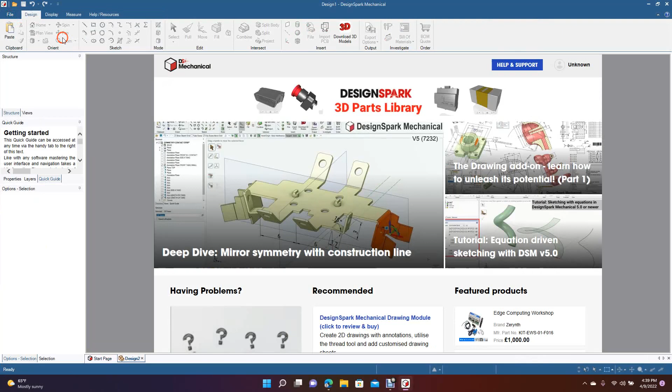Okay, we're going to go ahead and go to File, create a new design. We'll go ahead and change this to Plan View. Then we're going to come over here to File, go to DesignSpark Options, and make sure that this is in units, is in inches. So we'll go ahead and change that to imperial. Go ahead and click OK.

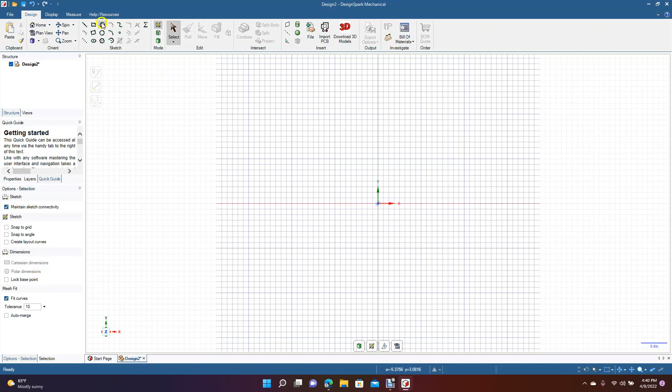Alright, so the first thing we're going to do is I got a picture of this graphic. We want it to be, looks like 1.125 in diameter. So we're going to go ahead and get our circle tool, and then we'll go from the center there and we'll type out 1.125, and then we'll do Control plus to zoom in.

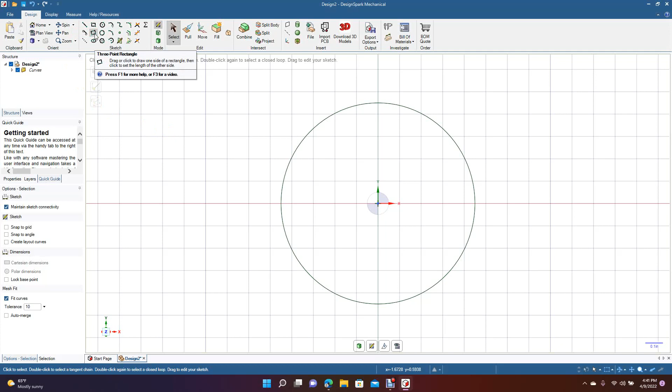Okay, this is going to be a 4-prong. So what we need to do is get a rectangle tool. So we'll go ahead and get this 3-point rectangle, and we'll define from center.

Then we're going to go ahead and drag that up, and we want to make it like... point one's not wide enough.

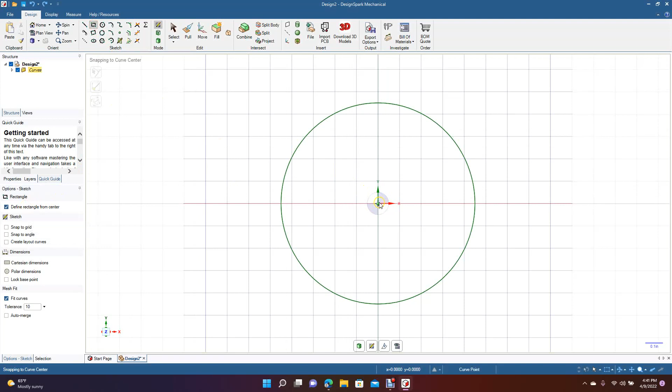Let's go to the regular rectangle, define from center. We'll click and we'll drag out. Let's make that about... let's go 0.3, so there'll be some room for you to grab the knob there.

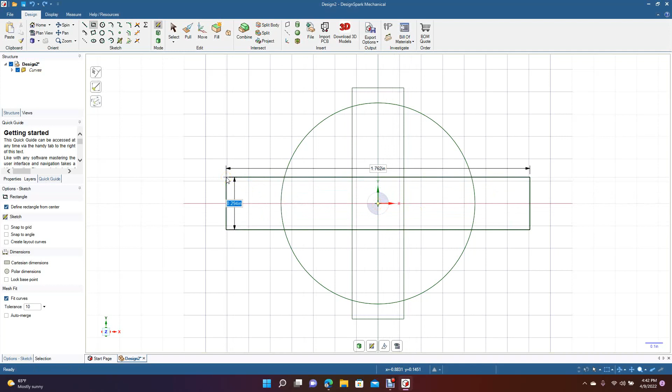Okay, now we're going to grab another one, so we'll go rectangle, define from center, and then we'll do one out here. We're going to type in 0.3 so it matches the other one. Oops, something happened there. Let's undo that. Let's go tab 0.3. Okay.

Now we have our little knobs in there.

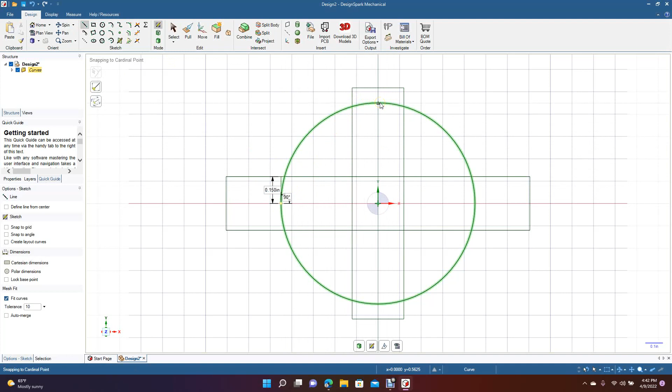Okay, so what we want to do is let's go ahead and get our line tool. We're going to put a line there, and then we're going to go ahead and put a line over here. Okay, so we have an actual point.

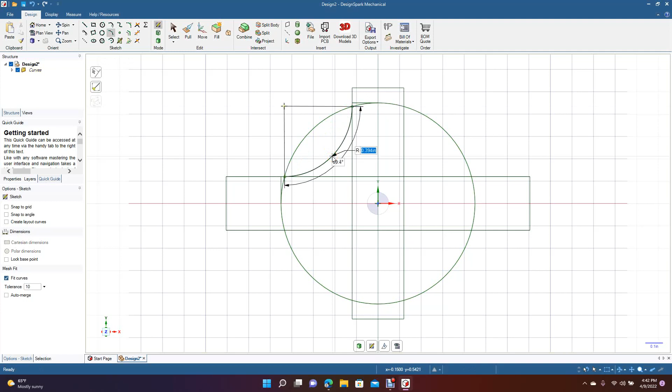Now we're going to go ahead and get our 3-point arc, and we'll click. Let's go from that corner there up to here. Didn't really need those lines after all, and then we'll go ahead and just end it there.

Alright, now we'll go ahead and get our trim away tool. Let's get rid of these. Let's get rid of all those.

Okay, we really only need this piece right here to rotate around.

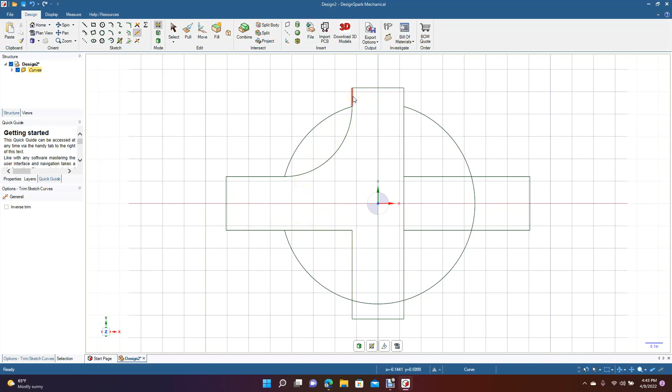So what we're going to do is go ahead and get our select tool, hold down Control key. We're going to get those there. We're going to go to move, then we're going to create pattern. We're going to drag this to the center, and then we're going to spin this around and then let go. So we have 4.

Okay, now we'll go ahead and get this trim away. Let's go ahead and get rid of those.

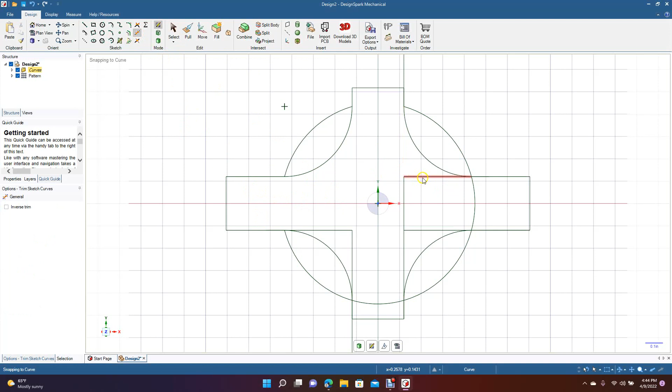Okay, this looks pretty good. This is going to be our knob right here.

The only other thing we need to do is cut these down shorter. So what we'll do is go ahead and put a line in here from the center. This is going to be 0.647. So we'll go ahead and get another line, and we'll go 0.647, enter. Okay.

Now we're going to go ahead and we can actually move this over. So let's go ahead and move. We'll select that line, and then we'll actually undo. We're going to go select this up to, and we're going to go up to that point there.

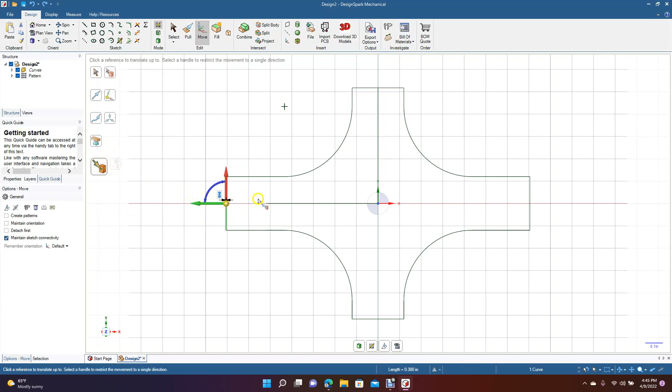All right. Now we're going to do the same thing there. We're going to click on that line, hit move, and then we're going to move. Let's change the anchor point. So we're going to go right here, anchor here, and then we're going to select this up to, and we're going to go up to here. Actually, that didn't move it.

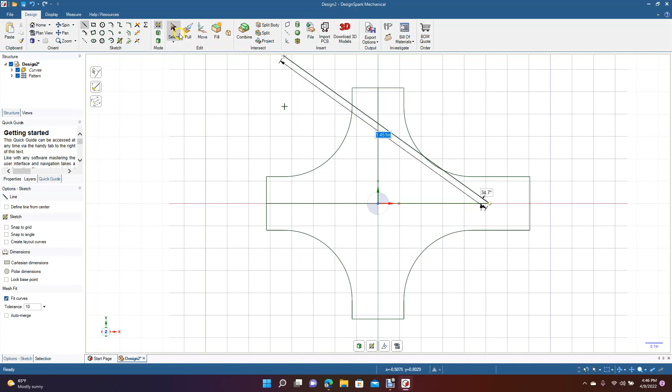Oh, 0.647. Let's put another line in there, going from here. Type in 0.647, enter, and then we'll select. We're going to click on move, move that line, and go up to this point here. Okay, now we have the knob that we need.

We'll go ahead and get the trim away tool, get rid of these. Alright, that's going to be our base knob.

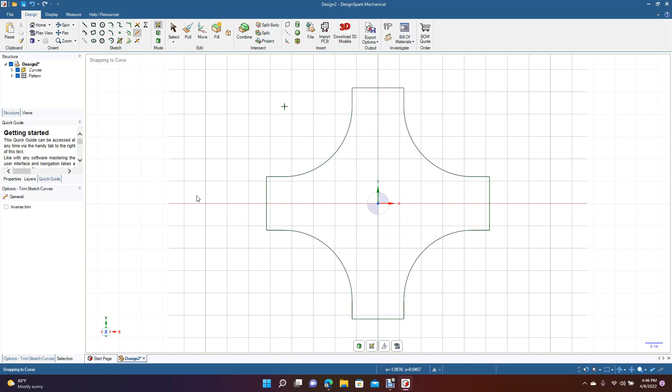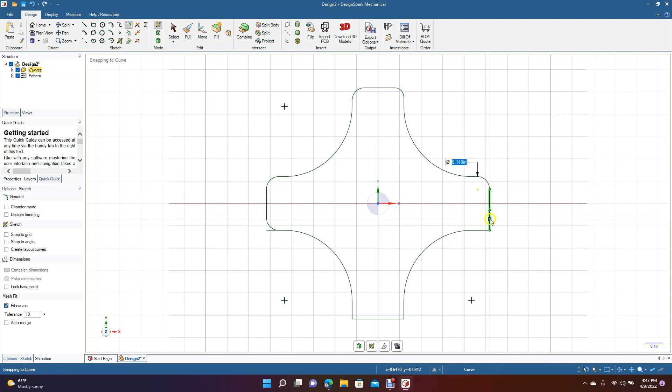I'm going to round the corners a little bit, so we'll go ahead and use the create rounded corner tool. We'll do 0.07, and then we'll do the same on these. I don't like corners to be sharp, especially if you got to grab onto them and turn them. This will be smoother.

Okay, so that's going to be the base. We'll go ahead and get our trim away tool, get rid of these. Get rid of that one there. Probably these little ones too. Oops, need that one.

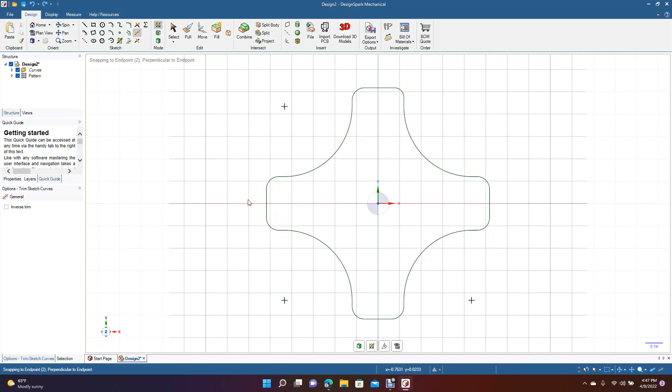Okay, so now we'll control minus to back out. We're going to add some thickness to this. Just checking, I see what this is going to be. So, 7/8 is the height.

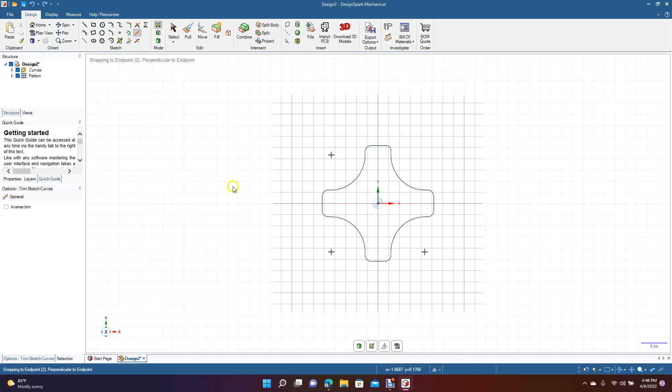Alright, so we're going to go ahead and go to 3D mode. Let's spin this. Go ahead and pull that. Just type in 0.5. Okay, that's going to be good there.

Now let's double click so everything is selected. We'll go to pull and we'll put a fillet on this. Oh, 0.05.

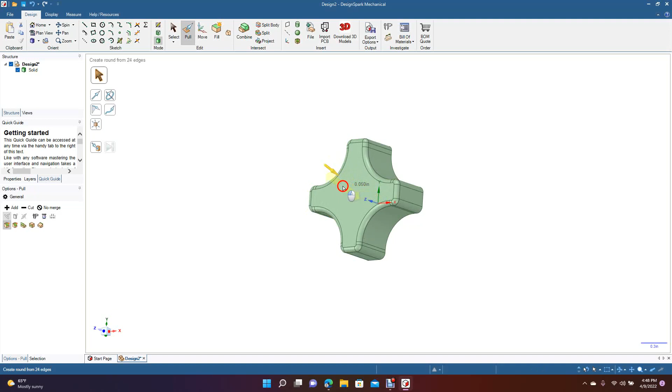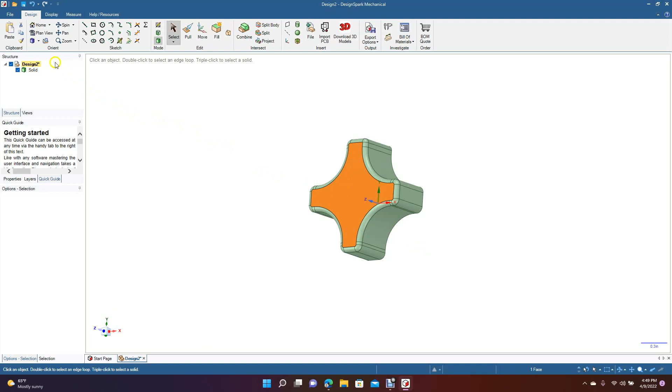Okay, check a couple more details. Now we're going to go ahead and put a select there. Go to plan view, I'm going to go ahead and grab a circle.

We'll go 0.25. Spin this. Needs to be a little bit bigger. Let's undo this. Give there a circle right there. Let's do 0.5 - no, that's too big. 0.4, 0.4 is about right.

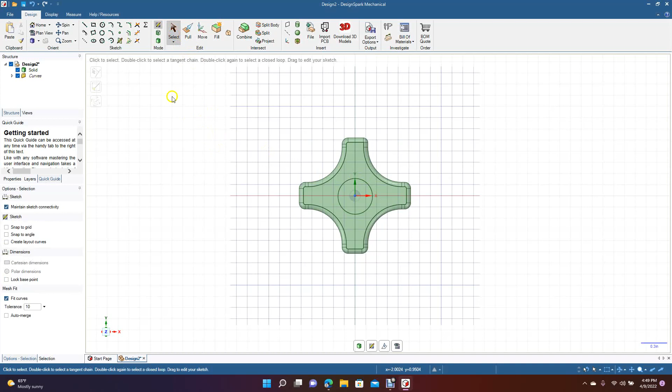Okay, so now we're going to go ahead and spin this. Grab the pull tool, go ahead and pull that straight through. Okay, now we're going to spin this around the back. We're going to select that, change that to plan view.

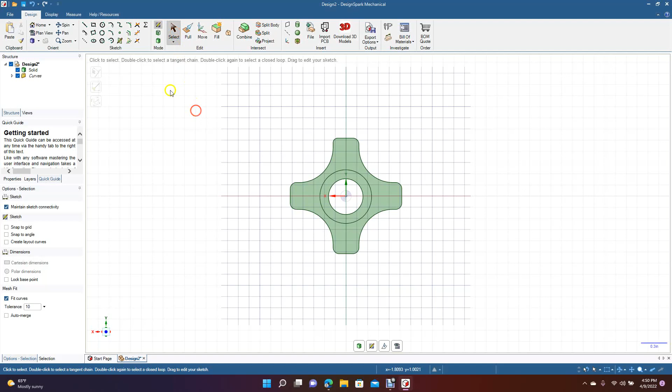We'll go ahead and get another circle. Make this 0.6. Now we're going to go pull. Let's select both of those. Pull that out to 0.25.

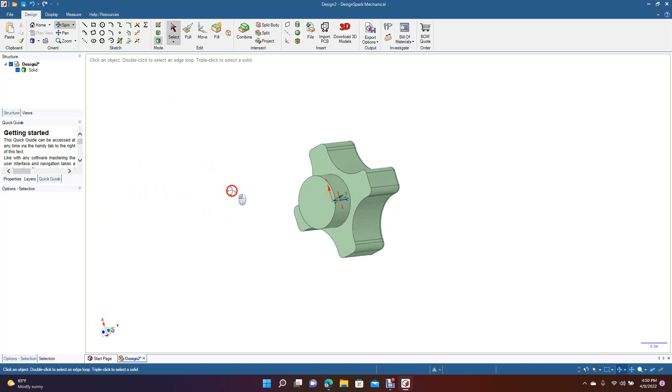Okay, that's going to be our knob right there. And then we want to go ahead and put some fillets on here. So we'll go ahead and double click everything there. Let's type in 0.5. Don't look like it did it.

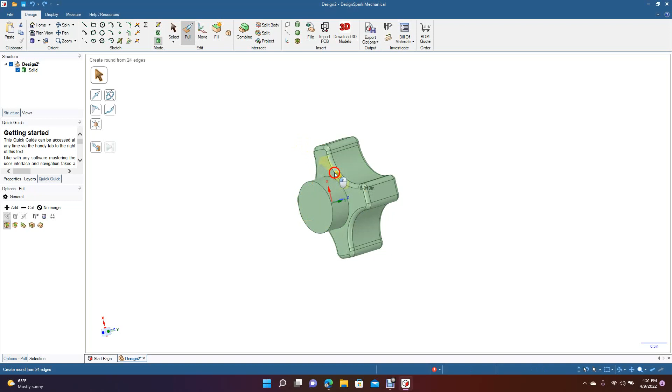Okay, undo. Let's pull that one more time. Oh, 0.5, okay. Now let's go ahead and get this pull, we'll go ahead and pull this. Let's do 0.2. We're going to grab that one there too, pull that.

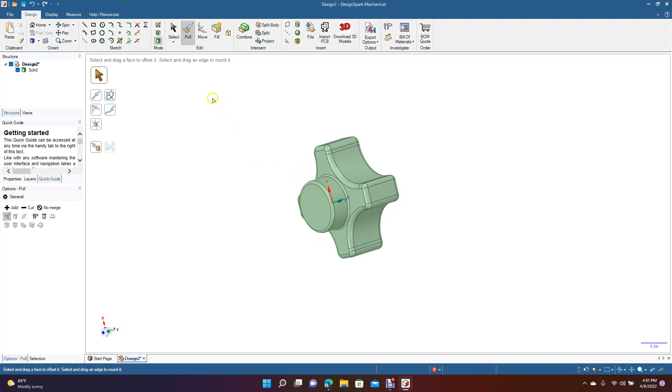Oh, 0.4, I believe that was. Okay, now we're going to go ahead and spin this around. Now we need to put a - let's go ahead and go to here, click this, go to plan view, get our circle. Let's type just the 0.25 hole.

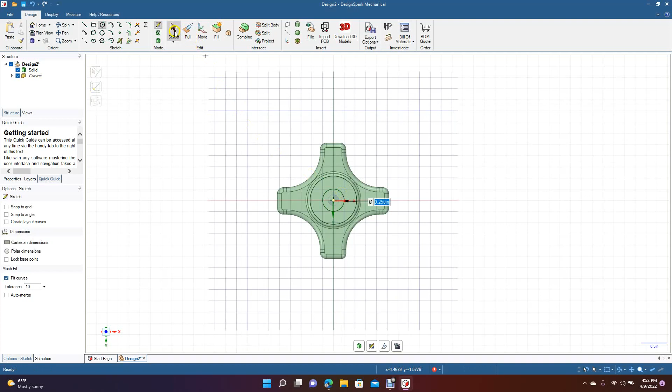We're going to go ahead and spin. Let's go to pull, and then we'll just drag this straight through. Okay, this is going to be our knob. And the only other thing we're going to do with it is go ahead and put a fillet in right here. Go 0.3, and then we'll put one in here.

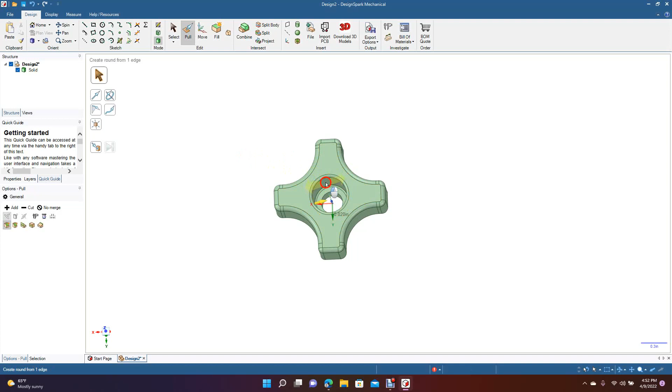Go 0.02. So your screw will fit down in here, and then this will go on wherever your knob needs to go, and then you can put a washer in here.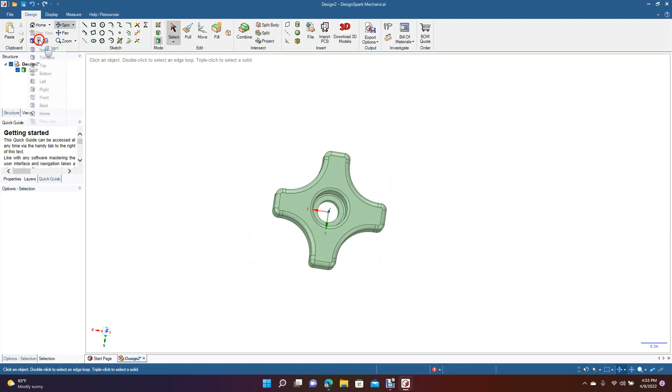View that from the top. It's a simple 4-point knob, replacement knob. You could pretty much make the dimensions here any size you want, provided that they're the size that you need. So you're going to want to measure the screw that goes in there, give yourself a little bit extra room, and then you're going to want to measure the bolt size or the nut size, give yourself a bit extra room. Then that's basically about it.

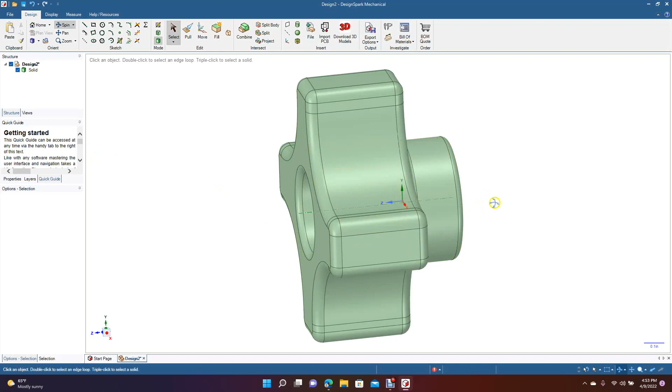Then you give yourself the right length there for the screw to go through. Make sure you put all your chamfers and fillets so there's no weak spots, and then you have a decent 4-knob replacement knob. Okay, that's going to end today's tutorial.